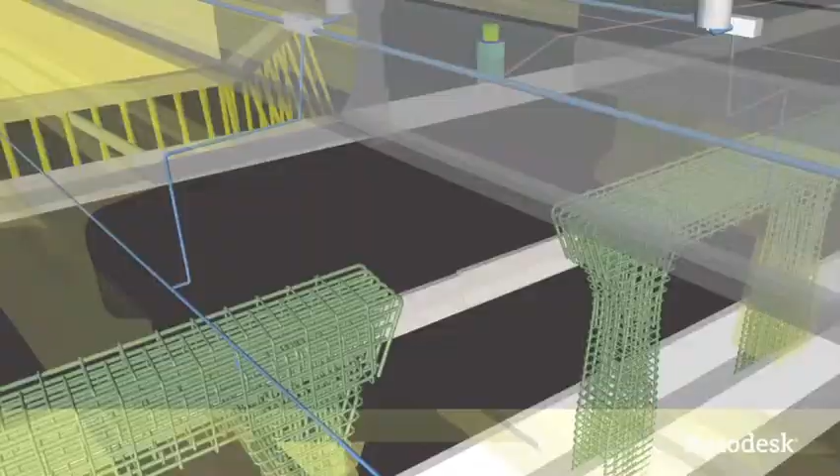Well, over the last 12 years, Mortenson has been implementing virtual design construction on all of our vertical projects. And I think what we wanted to do is take those best practices and apply them to all of our project types, including renewable energy and infrastructure projects. In terms of infrastructure specifically, it's the reduction in budgets and fast-track schedules that are really the driving factor. And in some cases, it's our customer.

In terms of the benefits that we see through the use of BIM and virtual design construction, it's a much higher value add to our customer at the end of the day. And being able to increase collaboration through the 3D environment, not only for our customer, but the designers, the construction team, our subcontractor, all the project stakeholders. Using BIM, everybody understands what they're seeing, and everybody can look at the project as a whole and not just separate it into siloed disciplines or activities.

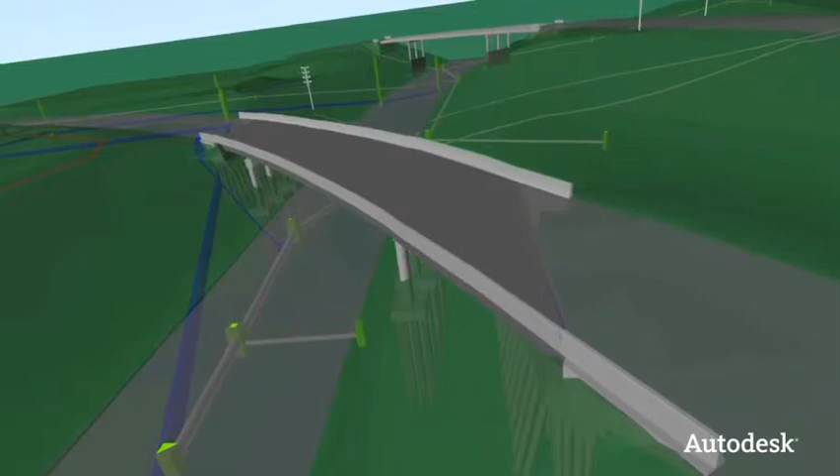And when you get a group of people together, the contractors, the designers, everyone involved, they're looking at the same thing. They're looking at exactly what's there, and you're able to use a model for disruption avoidance. You're able to understand what utilities need to be moved, and you can come up with a game plan as a team versus doing it the traditional way where you're assuming where the items are, you think you know where they are, and then you accidentally hit something. That delays the schedule, and it costs more time and money.

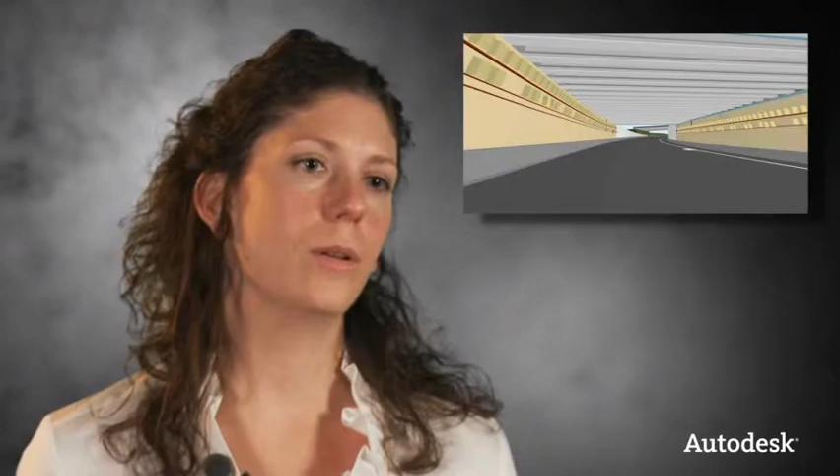You would be amazed at the people who might look at the model and use it for different ways. You might be able to go through the model and through a tunnel and look at light bulbs and how you're going to replace the lights in the tunnel. How's the fire department going to access if there's an accident? It shows where the fire protection is. It shows different lighting systems, and assists with people understanding how traffic flow goes.

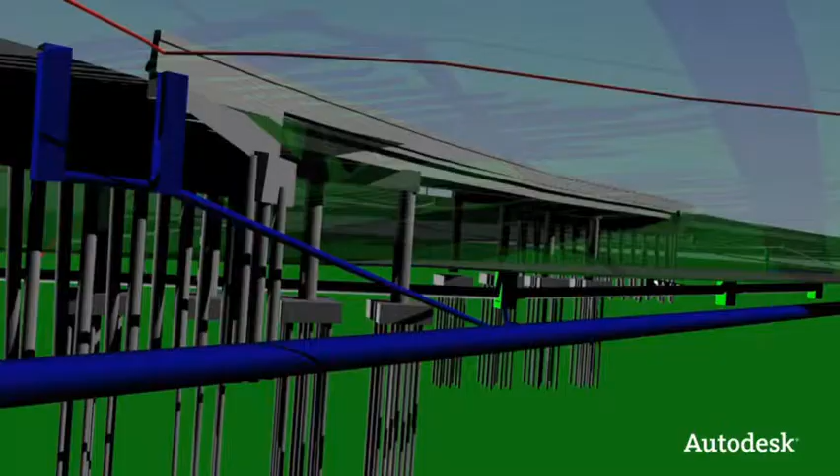BIM is improving the decision-making process, not just from the design side, but the construction side as well. And now the 3D model allows us to greatly increase the decision-making process. Working with 4D simulation, we're able to collaborate with the construction team and help them understand how the designers had intended to build the project.

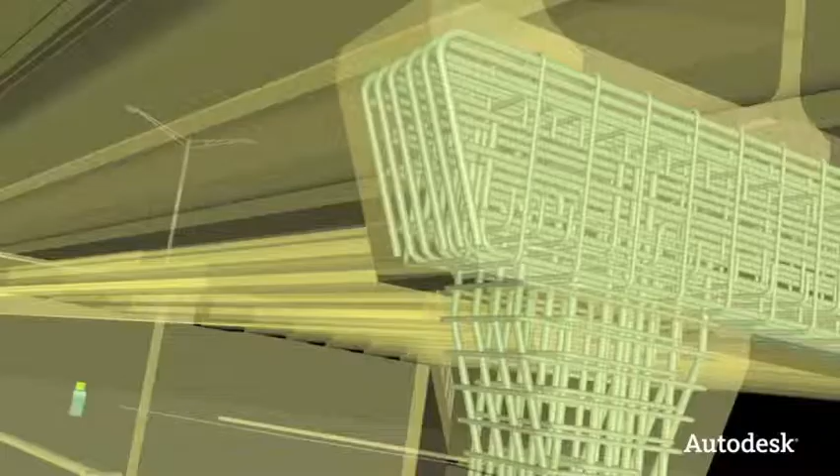One of the ways we see the infrastructure customers getting extra value is starting to think about automation and how they can take a construction process and make it more of a manufacturing process. So we can improve on efficiencies and productivity and reduce waste. But we can collaborate more effectively and not worry about the sharing of intellectual data or model information or design information that is not quite approved yet.

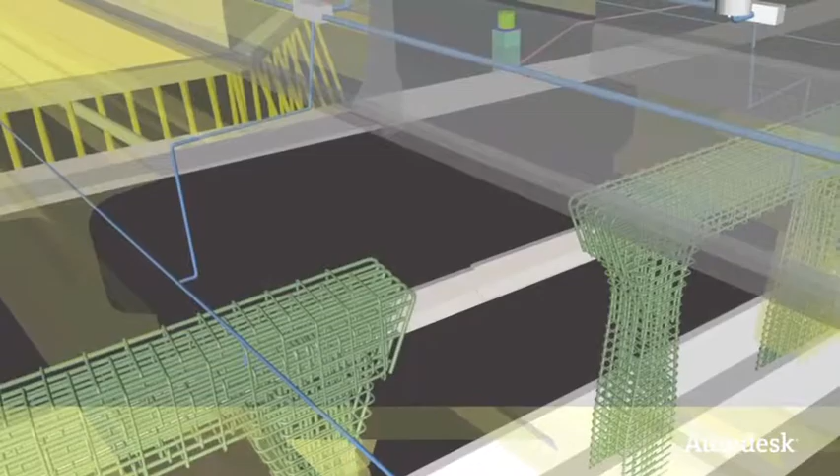Once you put together this model and you're using it for clash detection, for 4D simulation, for disruption avoidance, for maintenance, the life of the model goes on. You're always going to have that model. So you use it at the very beginning, but then people reference it throughout the project.

We see infrastructure projects in its infancy in terms of leveraging BIM and virtual design construction. And there's a tremendous amount of value and growth in this industry, and I believe that taking the lessons learned from the vertical projects and applying it to infrastructure will only lead to further innovation. With the technology that Autodesk has been providing, it's opened up new doors for new adventures and new clients, and it's a fun and exciting time.